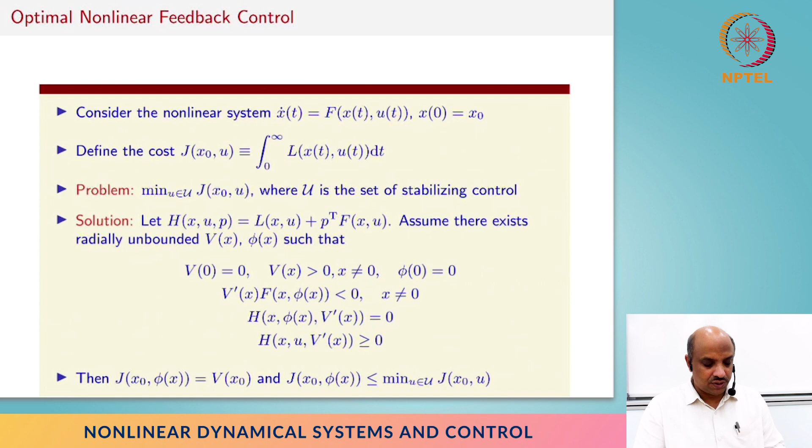So phi of x is going to be the optimal control. It required a little bit of work to reach this particular part, but otherwise the application is something that's not so difficult.

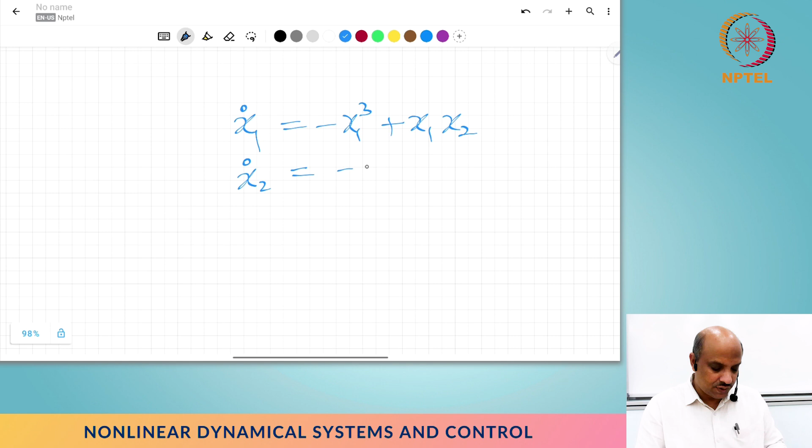So I'm going to consider this system: x1 dot is equal to minus x1 cubed plus, if I'm not mistaken, something like this, and x2 dot is equal to minus... I believe that's correct, okay.

And the cost function is basically 2x1 squared plus 2x2 squared plus half u squared. So it's a cost that minimizes both the state and control in a quadratic fashion, and the weighting of 2 and 2 and a half tells you something about which has more priority for us.

So we have to define H of x comma p comma u, or the other way, as L of x comma u plus p transpose f. So that's nothing but 2x1 squared plus 2x2 squared plus half u squared plus p transpose f, which is minus x1 cubed plus x1x2.

So if you actually take p to be a constant here, you'll end up with a quadratic part in u and a linear part in u. Let's say p is p1, p2. You'll get p2 x1 squared u plus some complicated function involving x.

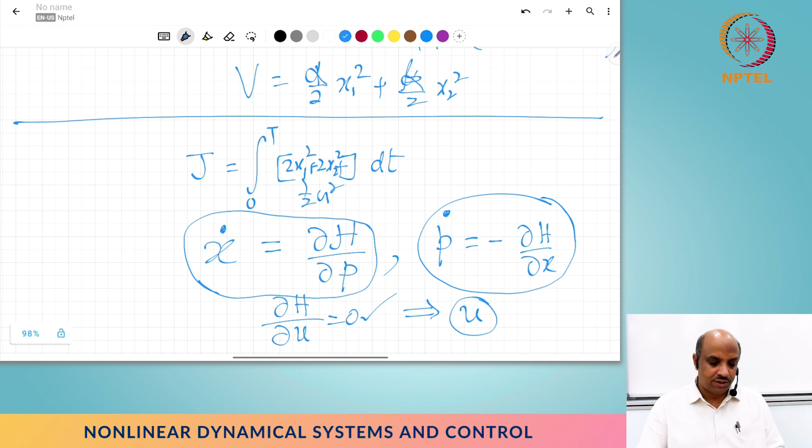So we keep shooting from the initial value problem for some p, and then hope that it will catch the final value, and somewhere some kind of binary search algorithm goes on - sorry, not binary, bisection kind of method works - and eventually hopefully we end up with an answer there. Though I didn't show you rigorously, one can try to show that p dot is going to become 0, and these things eventually will boil down to the same equations that we get in the infinite horizon.

So that was optimal control with feedback. And what about the next topic that we chose?

One of the topics we did ahead of optimal control was this cute idea of adaptive control. Again, it is about controlling systems for a general class, but here the typical assumption is that we don't know exactly something about this particular system - the standard assumption is some parameters are unknown. There are multiple ways of addressing this problem. If you are not even interested in control, then it is a matter of parameter identification. That is one problem. The second one is, once we know how to identify the parameters, perhaps use that knowledge in the feedback, and use the parameter estimate as the proxy for your actual value of the parameter, and treat it as a standard feedback control problem.

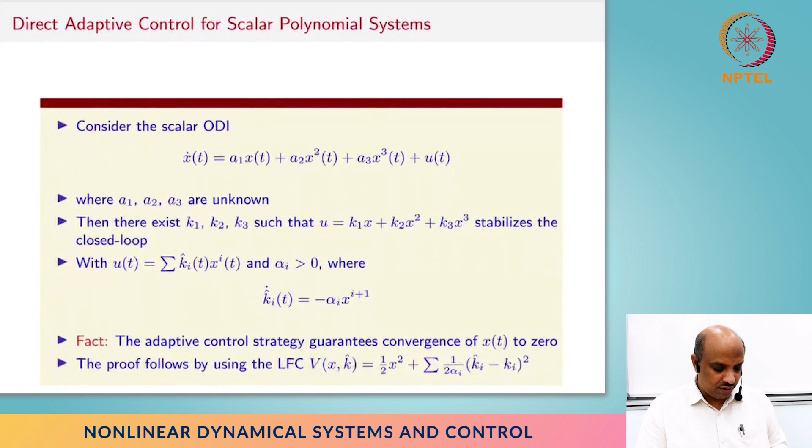Somehow we have to translate it to some parameter estimation problem, where the parameter estimate—in this particular case in direct adaptive control—corresponds to the feedback controller, and that can be essentially estimated through feedback law by using the appropriate Lyapunov function. There's really no standard method beyond the few examples we see, but you can generalize it a bit more. That looks very confusing, but essentially the idea is the same.

The same idea can be extended—instead of just stabilizing, if I want to actually track some other stable system. The basic system need not be stable, but the feedback control should be able to stabilize it, and once we stabilize it, it should be able to track some system.

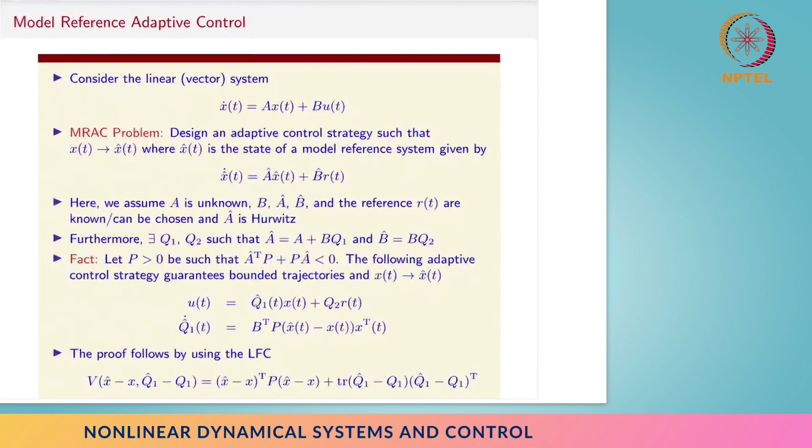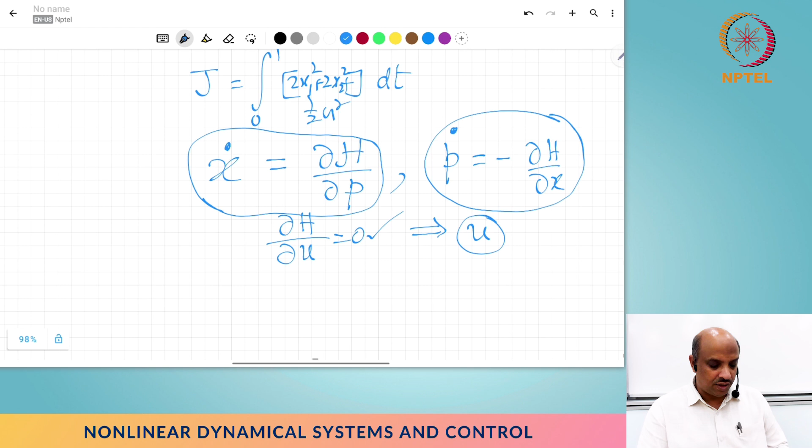We call this model reference adaptive control, and the idea is the same, so I'm not going to repeat much of this—we've gone through it extensively at some point. But I want to go back and show you a slightly new problem and see what happens, how we succeed in certain cases and how we do not. Hopefully you'll see one last example of the adaptive control idea.

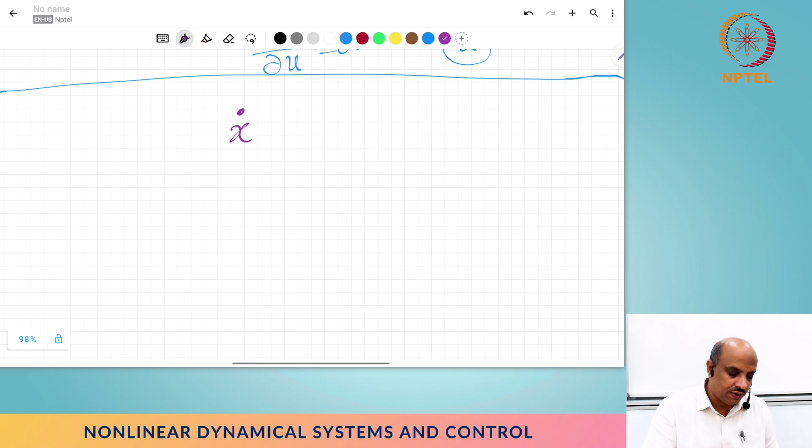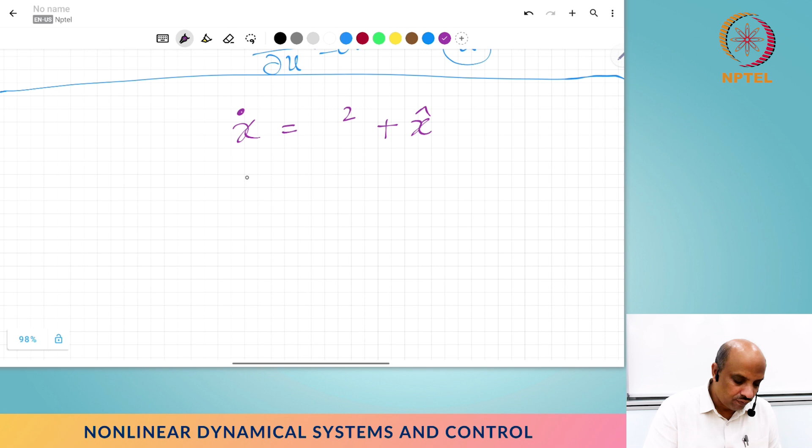Suppose I had something like this: x squared plus x hat, and u is equal to a... x hat dot is equal to, I don't know, a x hat plus u. Okay, so this looks very much like the cascade system I was talking about. This x hat could be viewed as a stabilizing controller for the first one, and the second one has its own dynamics, and we want to cancel the second one.

But then if we stabilize the first one, then if we stabilize the second one through u, hopefully the first one gets stabilized because x kind of going to 0. Except I'm going to assume a is unknown. So can I actually use my adaptive ideas to solve this particular problem? So if you recall, basically...

Let's treat each one problem. So this particular problem, I could realize that by doing this, something like minus x square. So this minus x square, when I put that in place of x hat, that stabilizes. So that's like basically adding and subtracting this.

Whereas this part, somehow we'll figure out what needs to be done. And for the time being, let's assume that we know exactly this thing. So I could choose u to be minus a x hat plus question mark.

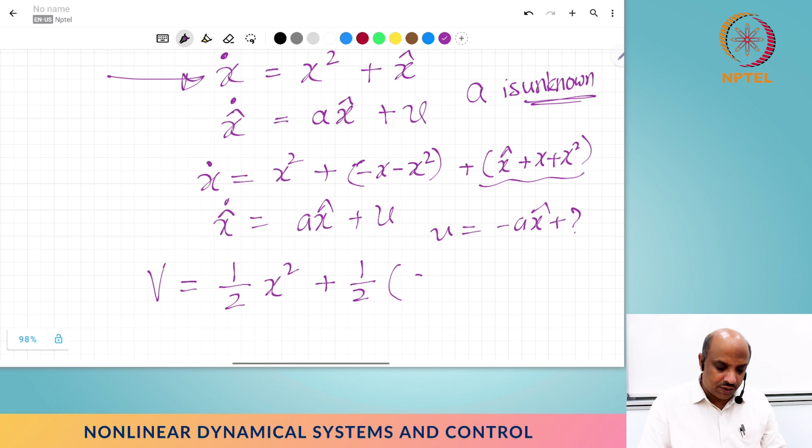So if you recall, basically the procedure is something like I can choose half x square, plus half x hat plus x square whole square. And if I basically try to compute the derivatives, I'm going to get something like x hat dot plus x dot plus 2x dot, which I know what it is.

And x dot on the other hand is ax plus bu, so ax hat plus u. So u can be picked in such a way that that becomes minus of some small number multiplied by that.

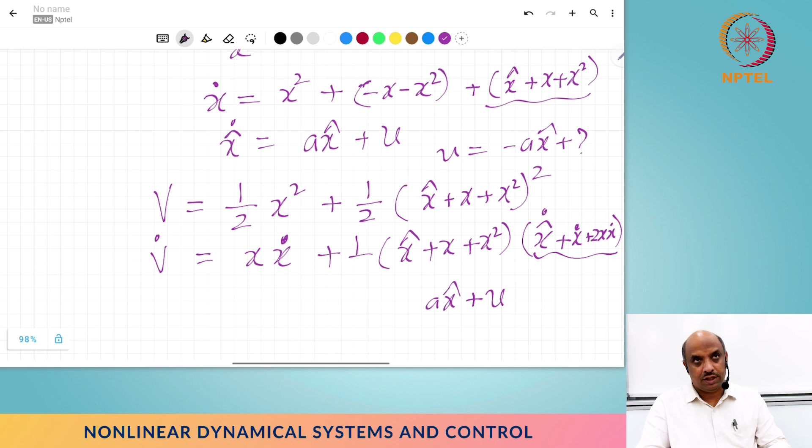So this was the idea that we used for cascade systems. This is how we actually solved it. Now the problem is here we don't know a. So what can I do?

Well, I can actually, instead of doing this minus a x hat plus all this junk — c times x hat plus x square plus all this x dot kind of a thing — instead of that, I'm going to basically assume a hat.

And to this, basically, I'm going to add a hat minus a whole square, where I'm going to design a hat dot is equal to question mark. One of the things we need to understand is when we try to do all those things, eventually nowhere should you depend on the unknown parameter a. Similarly, a hat dot also should not depend on the unknown parameter a.

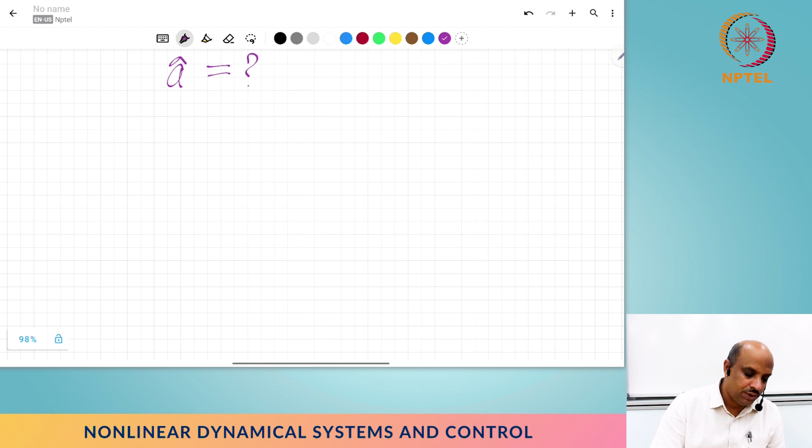So this is how one can apply or extend the idea of a feedback system in this cascade framework. But let's try to extend this idea to something else.

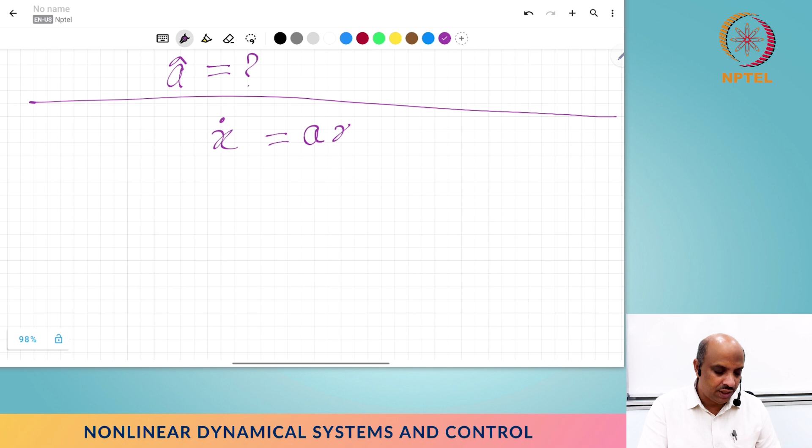So suppose x dot equals ax plus x hat, and x hat is equal to, for the timing we don't even care about that, let's suppose this is simply u. So in this particular case, we'll assume a is unknown.

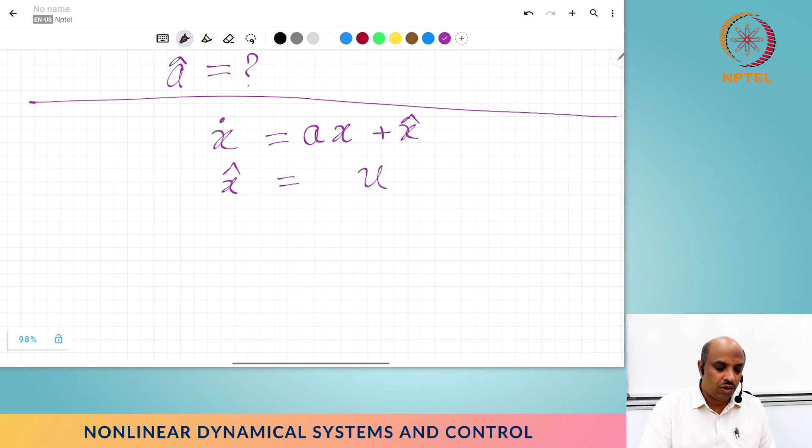If it were known, then we could actually solve this entire system as v is equal to half x square plus x hat minus some k of x, where k is such that k plus a is less than 0. So that's the feedback stabilizing controller, if you view x hat as the feedback, and this cascade idea we are trying.

But if we don't know a, then we don't know k, and then how do we deal with it? Well, I could try this: instead of that, basically half of x square plus half x hat minus k hat of x, plus half k hat minus k whole square. Let's see what happens.

I mean, this is getting slowly complicated, but hopefully. So I'm going to get x x dot plus x hat minus k hat x times x hat dot, minus k hat dot x, minus k hat x dot, plus k hat minus k times k hat dot.

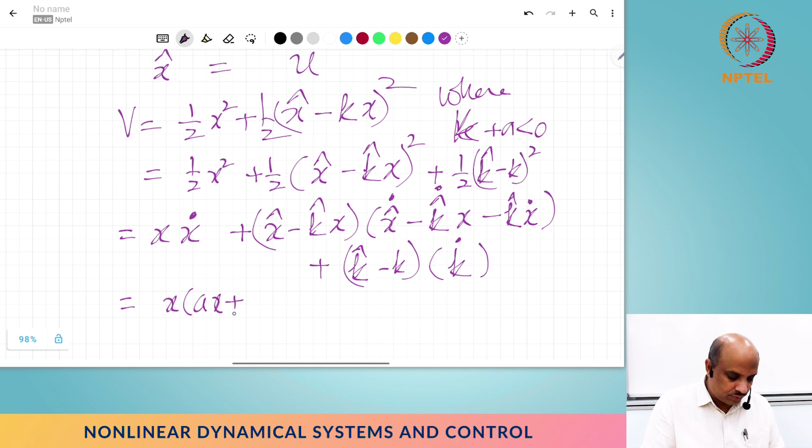Okay, so x dot is ax plus x hat, plus all this thing. So I'll get a plus k x squared, which is nice, it's negative, plus I'll get something like k x hat minus k times x, right? So the thing is, as you can see, basically this part has x minus kx, whereas this part has x minus k hat. So we can add and subtract that, and hopefully we can pick our u and things like that, but it's getting complicated. My suspicion is it won't work out, and that's the difficulty.

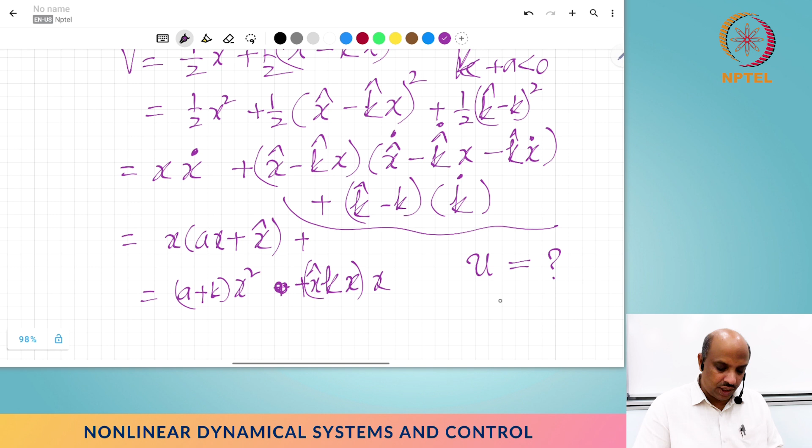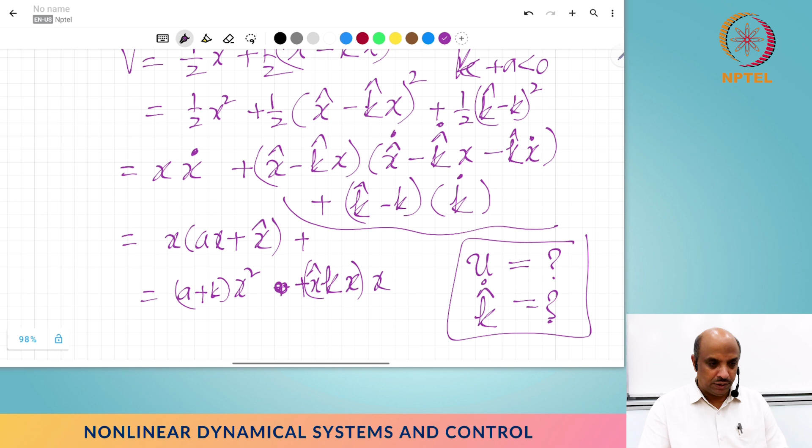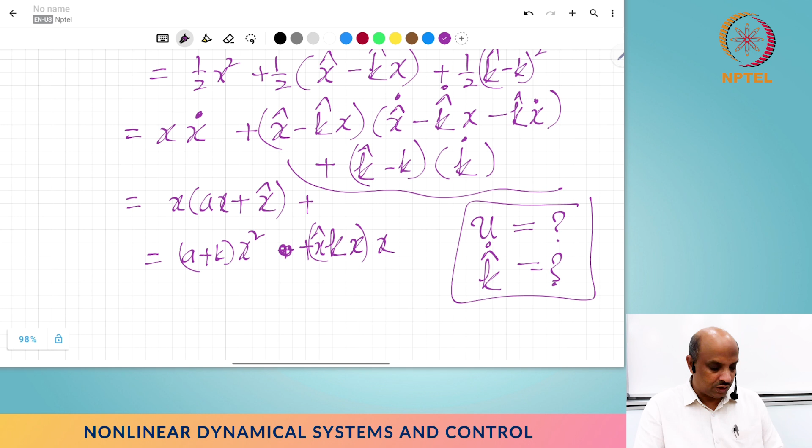One can try out some of these ideas, but we'll eventually end up with u equals something, k hat equals something. Either of them may contain k, and that will essentially ruin the procedure. Because the idea of adaptive control is we want to solve this problem without using the knowledge of certain parameters. If we don't know a, at least we know there is some k which is still unknown that stabilizes this, and using that idea and this cascade idea, we can try to construct this, but we'll end up with a real mess. I would urge you to try and convince yourself whether this works out or not. It's an open problem for you to consider, kind of a research problem, per se.

So that essentially brings us to the end of lecture 12, last but one lecture, so to speak.

The key ideas to remember for the longest time are, of course, the basic idea of stability, and how to check stability using these Lyapunov functions. That's the first idea. The second idea is this extension to input-output systems, this concept of dissipativity, which was very useful in specializing to robust stability analysis and the absolute stability problem. So that's the analysis part.

Then of course we looked at feedback control systems. One of the first ideas is basically feedback dissipative systems. If you have two systems in feedback with certain supply rates, they stabilize with each other. That's one idea that's very, very important for us to remember, and that's obviously very useful to do a lot of things in robust control.

But beyond that, in general, we'll have a class of feedback controllers which we can optimize against, and that brings us to optimal control. It's complicated enough that we worry about the stability, but then optimality is even one more layer on top of it. We have some sufficient conditions applicable to some very special classes of systems, but otherwise there's no general theory.

Whereas the finite horizon problems, where we don't really worry about stability, we can actually do something interesting there, and that's how people solve finite horizon problems, like sending a space shuttle, and many things like that. Others are more academic, but the most applicable that I can think of in optimal control is actually sending space shuttles from one point to another, where the disturbances are practically not there, and then you can actually set a path and follow that.